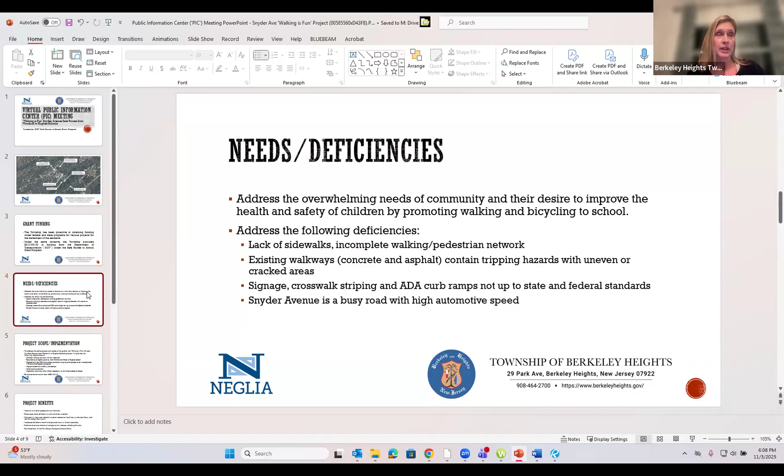If I can hop in for a second, Mike. So kids coming from the Timber area, if they don't go through some path, they're walking down Locust. They have to cross Snyder at the rescue squad to get to the sidewalk on the opposite side toward Hughes. Then when they get across from Hughes, they have to cross again to get into the school because there's no sidewalk on the Hughes School side of Snyder. So that was the biggest need right there.

Thanks for butting in. With all these things to consider, we settled on a project scope. Mainly, number one, we wanted to connect the walking network and extend it up Snyder to the school, to help alleviate the issue of kids crossing Snyder twice just to get to the school.

Additionally, we wanted to make sure we resurface the asphalt pathway in the back that kids take from Old Cannon Road to the school. It's just not in good shape right now.

We also want to make sure we're upgrading and implementing ADA compliant curb ramps, pavement striping, and signage, to be in compliance with federal and state standards - MUTCD, NJDOT, DOJ, ADA requirements, and so on.

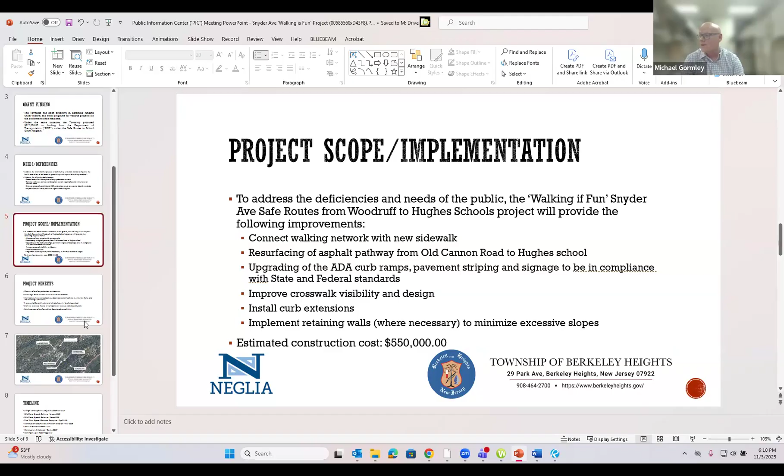Additionally, we wanted to improve crosswalk visibility and design, install curb extensions, and implement retaining walls where necessary along the frontage of Hughes School to minimize excessive slopes in the area. All in all, we anticipate an estimated construction cost of $550,000, which is a little more than the $517,000 grant we received.

Benefits of the project: number one, creation of a safer pedestrian environment, limiting the number of times kids are crossing Snyder Avenue, making sure everything's properly signed, striped, and compliant for all, even people with disabilities.

This way we would encourage more kids to walk to school. But even more than that, as a secondary benefit, it also connects the school to the other school. It completes the walking pathways to other facilities such as Snyder Park and the township's downtown.

Also, it just increases children's health and physical activity levels through exercise, biking, and walking - promoting alternate means of transportation to reduce vehicle pollution, and also reinforcing the township's complete streets policy, which is a very important thing the township has been looking to better over the past couple of years.

So again, looking at the site location map from page 2, as I said, we're looking to implement concrete sidewalk along Snyder Avenue's frontage, an asphalt walkway in the back, upgrading of ADA ramps where they fall within the project, and improved crosswalk visibility, and so forth.

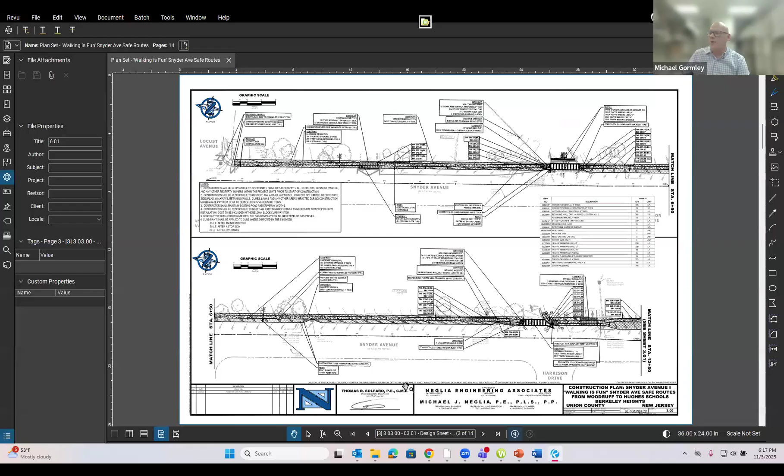Yeah, of course, I actually have the plans open so I can walk you through them. Is there any way you can make that bigger, Mike? Oh, is it small? There's some sort of presenter view or something. I don't know, I never know how to use it. Okay, one sec, let me change up my sharing in a quick second. It's not major, but the equivalent of slideshow in PowerPoint. Right, oh yeah, yeah. Try this.

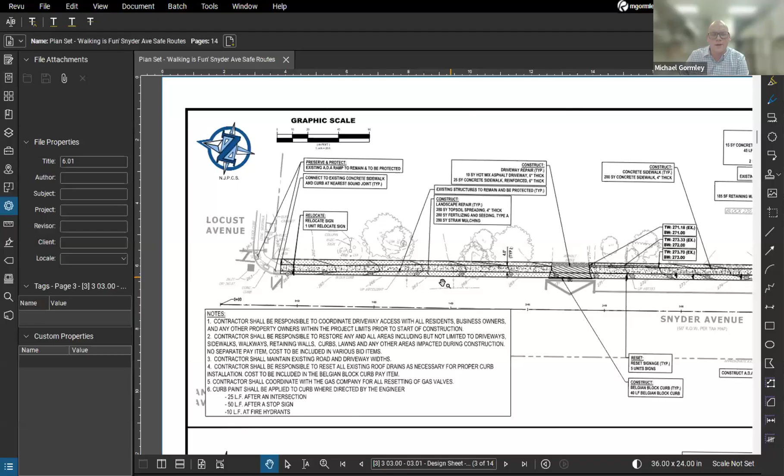Okay, so do you guys see the plans? Yeah, we can see them. Perfect, so I'll just quickly walk you through the plan step by step as we go. Pretty much we start right at Locust Avenue and Snyder Avenue intersection. These ramps were deemed compliant ADA ramps, so we were planning on the plans to leave them.

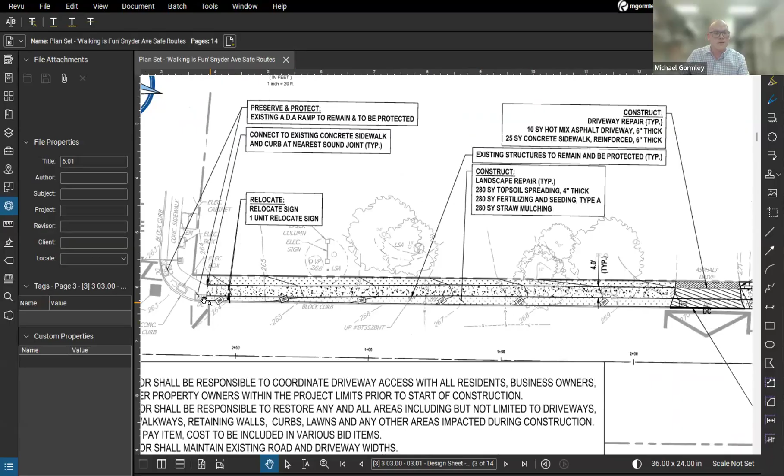The sidewalk ends right here. Currently, this is where the kids across Snyder Avenue have to go up. So the plan is to put a new sidewalk along the shoulder.

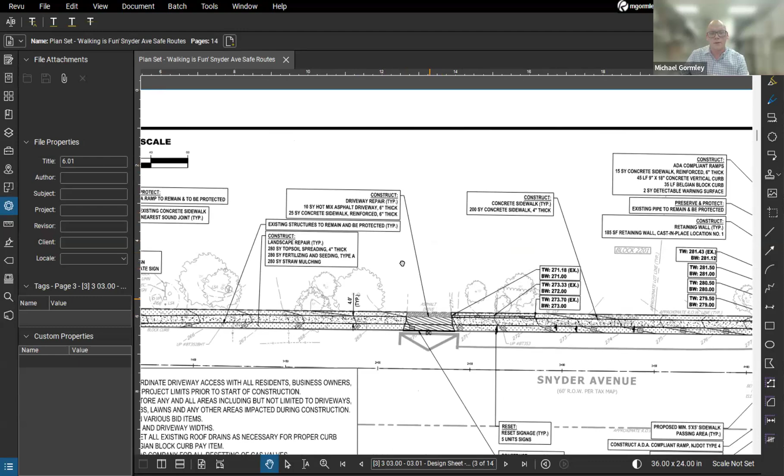This is the EMS building, the rescue squad. We'll do a new concrete apron over there and continue the sidewalk.

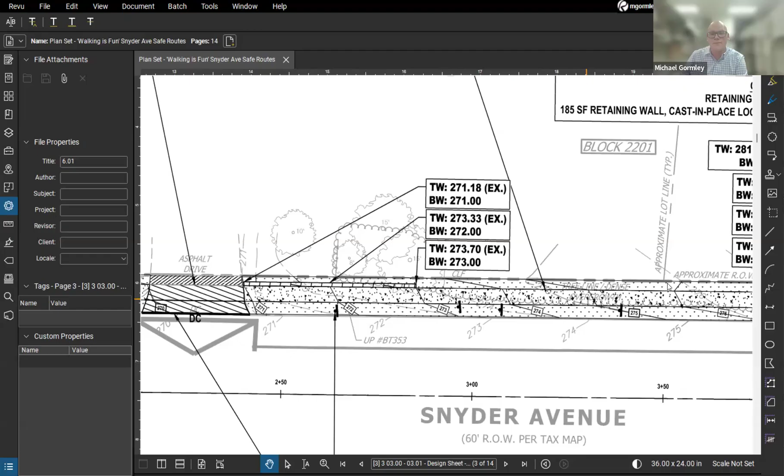Where you'll see it's kind of littered, there are these little walls. They're not super tall, just to make sure we're complying with grading standards and not having too steep areas.

Continue along, and then we'll get to the exit driveway for the school. Handicap ramps, this one is.

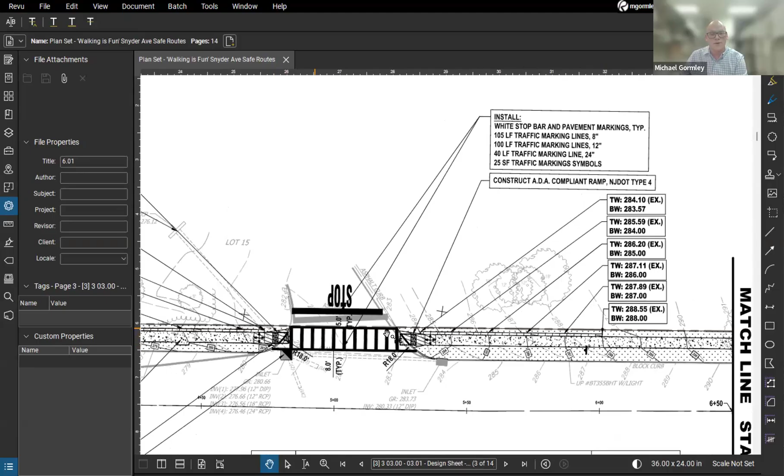This is called an NJDOT type 4 ramp. I believe they're both type 4s. Ramps across the driveway, the exit driveway of the school, receiving ramp, continuation, and retaining wall where needed.

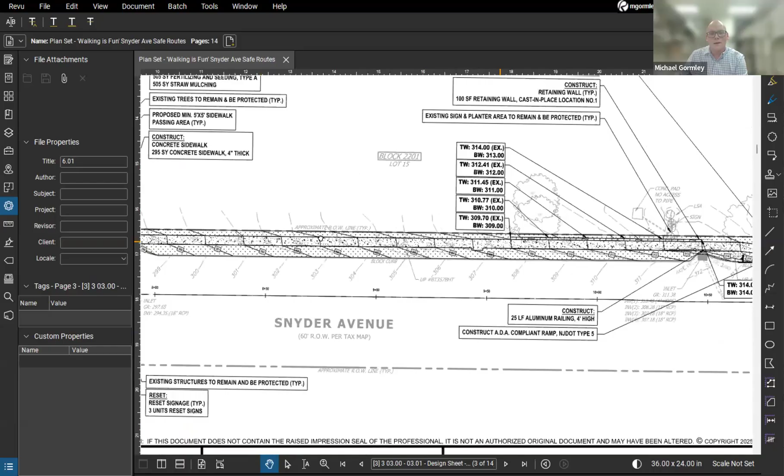Continue up along the frontage of this huge school, and then this is the entrance driveway for the Hughes School, the big loop.

New curb ramp here for receiving this ramp as well as over here. Michael, can you talk about that curve where your cursor is?

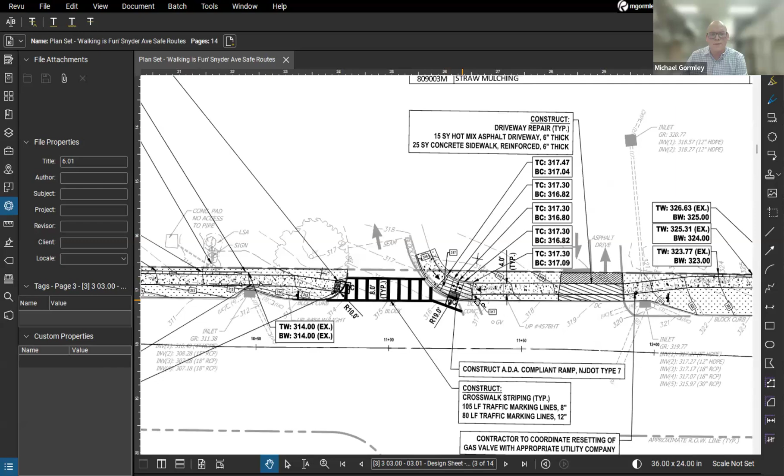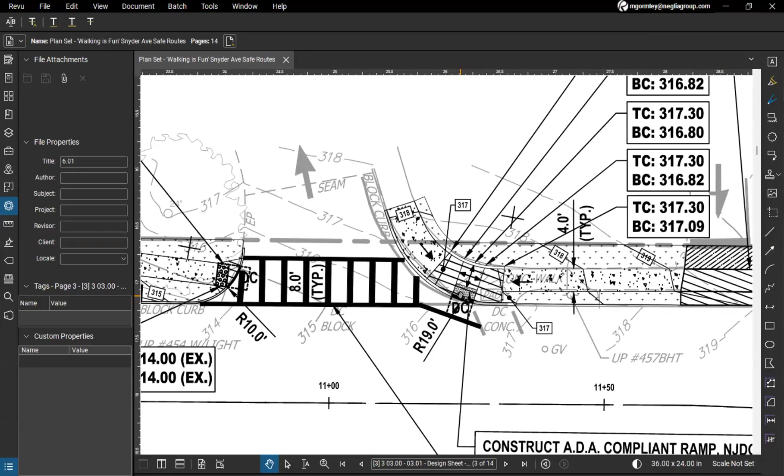It's got that rubber mat with bumps, but it's facing kitty corner to the street instead of either of the sidewalks or crosswalks. Can you explain the placement and angle, and why that compliant ramp doesn't seem to be leading to a crosswalk?

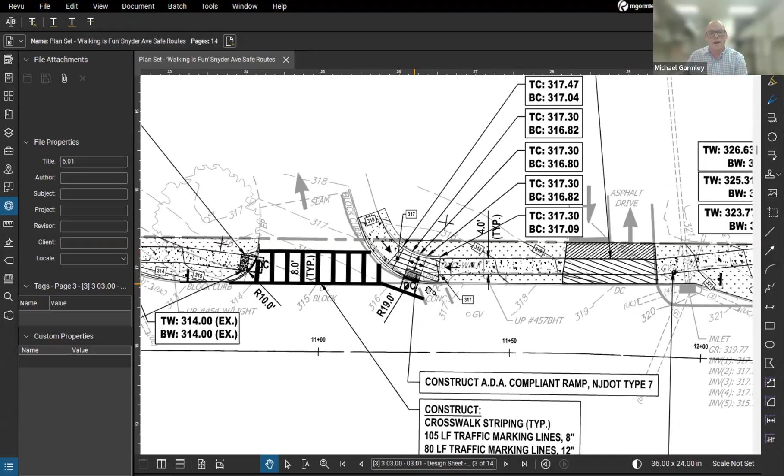Since it's receiving two ramps at the end of the day, there wouldn't be enough space to put two separate receiving areas and come back down. So this is the ramp type the DOT recommends, a ramp 7, as a way to receive both this area, this ramp, and this ramp down here off Harrison Drive.

But do you see what I'm saying? That ramp, if somebody were visually impaired, they would be walking into the street, not onto a crosswalk. Where that ramp is placed, you'd walk forward from it into the intersection, not toward the ramp in either direction.

So that was a question that I had when I reviewed the plans.

Besides what I just stated, where there wouldn't be enough space to have two receiving areas for each of the ramps, there's really a big challenge in this area. I'm assuming everyone's familiar with it—it's very steep to get up this hill. If we tried to tuck the ramp up here to make it compliant, you'd pretty much have to chase the grade all the way up to the school.

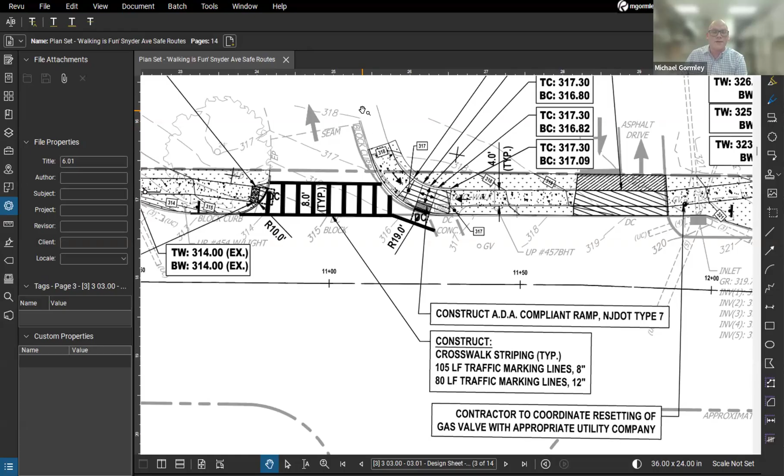Where's what seems to be not shown here—the existing crosswalk that goes across Snyder? It starts right here, those gray lines. Okay, it's just hard to know because you don't see it going across the way.

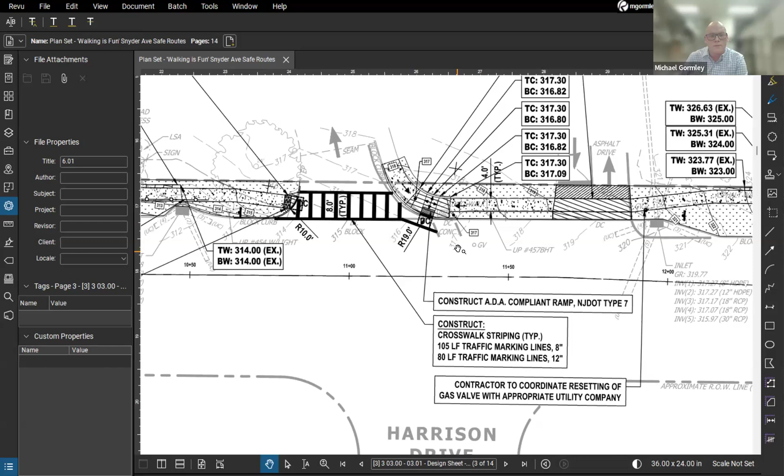The survey was kind of cut off since it would have been excessive to show all the roadway when we're not really touching the roadway much in this project.

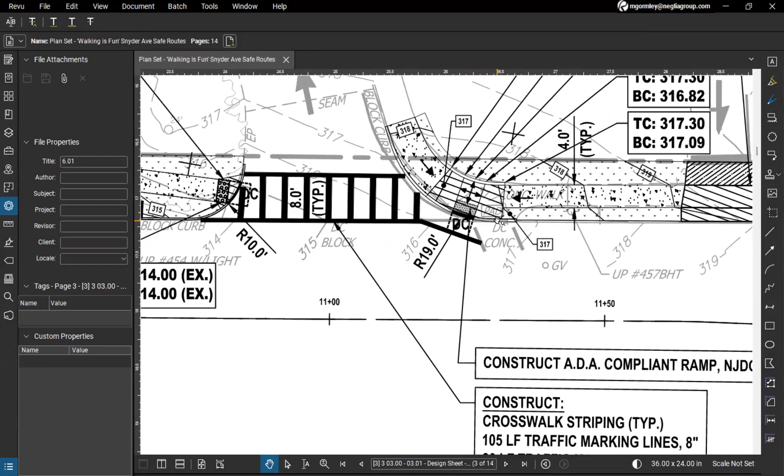So where's the curb cut on that? Because here the crosswalk is a little wonky—where those broken lines of the crosswalk are, there are those two lines next to it.

What is that? It says block curb. So does the crosswalk actually go into a curb?

Keep going. So with your cursor, this on the other side of the ramp. No, the other side. Over here. Yes. What's happening there?

The top line. Which one? Top on this one. No, the crosswalk. Yeah, we got the horizontal lines and the vertical lines to indicate the crosswalk, and the top line, that's the curb, right? And she asked, is that hitting a curb? We think yes, it does have a curb.

Now, I'll add what I notice is that it looks like to the right of the new cutout that's at grade, to the right is the original pad. I guess that's the original.

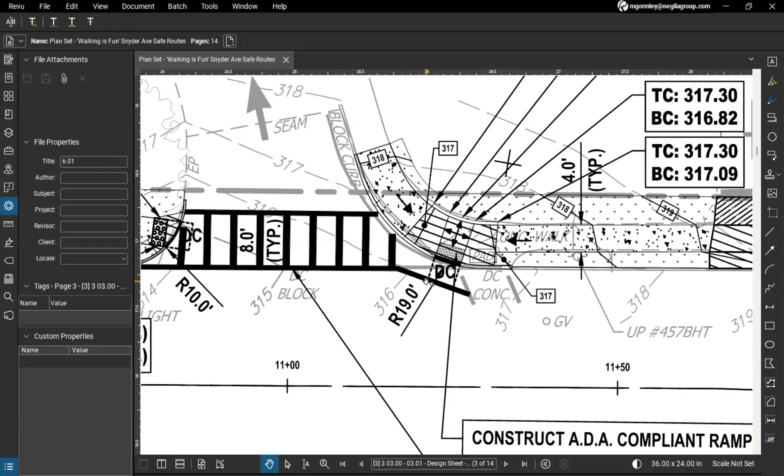And we do it with an electric scooter. Or less, correct. Understood, the means of travel. Yeah, I understand. But it just doesn't seem like there's that much space there.

Mike, can you tell us what that offset distance is right there? This should be 4 feet by 4 feet. Yeah, which is kind of what I thought. It should be 4x4, but we will double check, Councilwoman, to make sure that it complies with the state standard. DOT allows it with their crosswalk design, but we will double check it.

Mike, is there any way we can actually maybe add a second detectable in there, or maybe even a half a detectable, or is there not enough room? So yeah, this was kind of extensive design. We were going back and forth.

At the end of the day, there really is not enough room without the -- not even -- no, but what I'm saying is right next to where the proposed ADA is now. On a design, can we add another half a pad or no? Right here, like this way, on this side? Yes, right there. We could. I just -- the more we go, the more we're gonna have to chase the grade back.

No, I understand. If we want to be compliant, so if not, we'd have -- yeah, why don't we -- and not to cut you off, I apologize.

So why don't we try to stretch the ADA detectable a little more, and see how much we need to chase up the street to keep the depressed area a little longer than just 4 feet in the front. Maybe we can make it up to 6 feet, which gives us a little more inline traffic going in and out of the ramp. You know what I'm saying? Yeah, I know what you're saying. So we can definitely take a look at that.

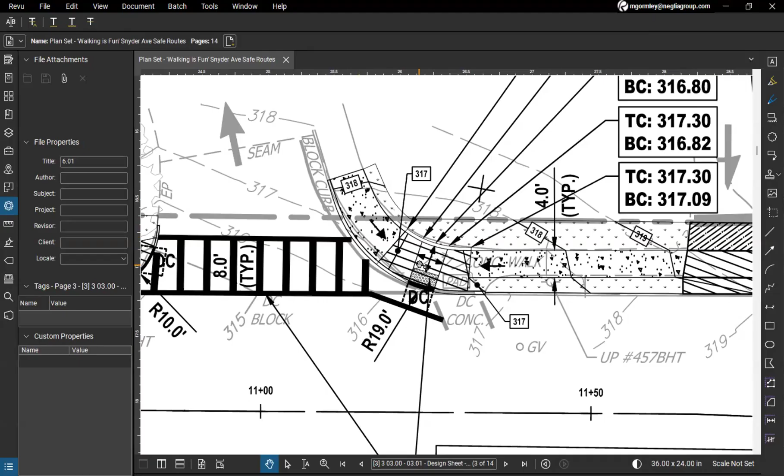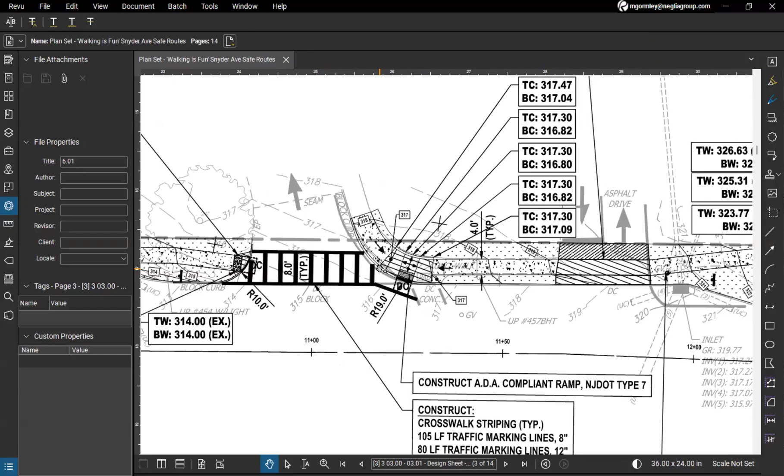And we'll double confirm the offset distance from the curb line or depressed curb to where the stripe belongs. Will any trees be removed during this? I believe in the estimate or the plans there's about 2 or 3. And those will be replaced on the school property, I assume? Yes, we would work with the Board of Ed and other properties along the frontage where a tree may come out or a tree may have to go back in. So yes.

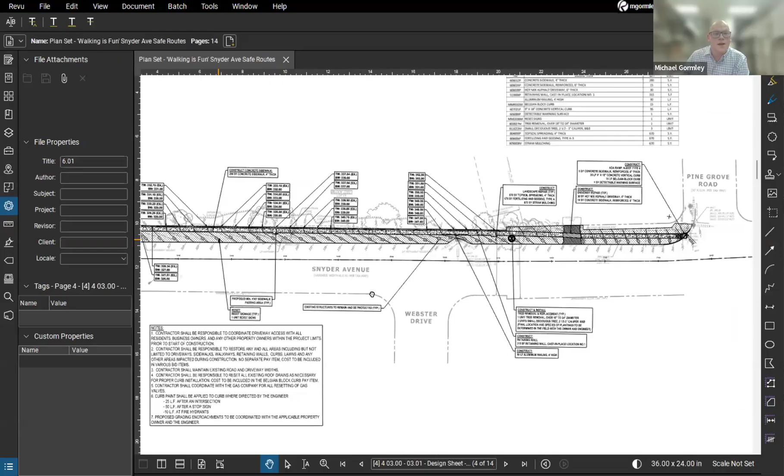Okay, my mostly is actually on there's one tree removal up, I have to jump ahead, but this is up Snyder Avenue by Pine Grove Road and Webster Drive. There was this one tree where currently the path is a little too close to the property line, so we're going to put in a new path and would probably have to take this tree out.

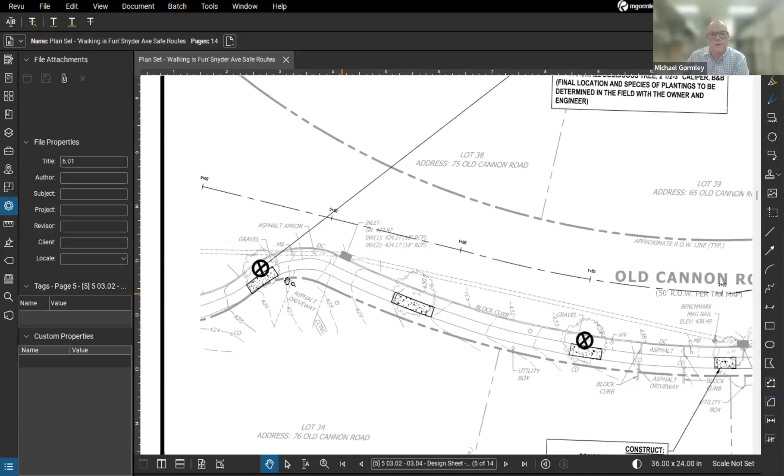We're going to have to take a tree out there, and then skip ahead to Old Cannon Road. I believe there's this tree and this tree. They're a little too big and they're causing tripping hazards on the sidewalk, so they're going to have to take them out.

There's actually sidewalk work planned on Old Cannon Road? Yeah, very minimal. It's really just where tripping hazards were observed, and then upgrading of these handicap ramps to be compliant.

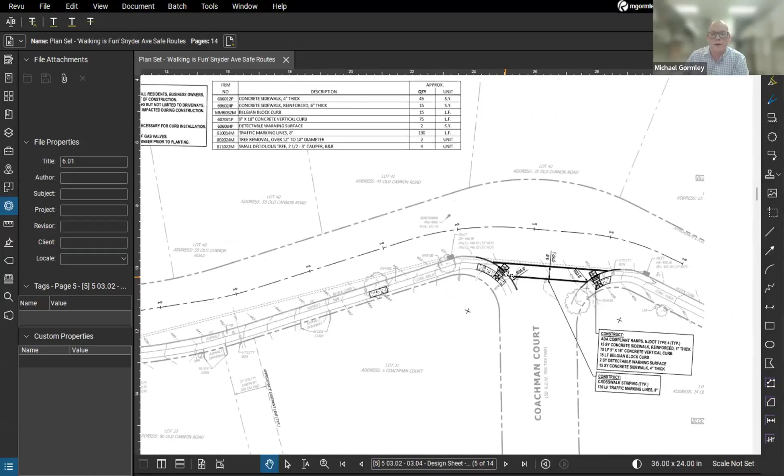Okay, yeah, I understand the need. I've been there, but didn't know that. It's kind of replace as needed, Steve. I mean, obviously there's some tripping areas, you're aware of it because you travel it often. So we definitely want to minimize that and put in conforming sidewalk with slope and get rid of the hazards, of course.

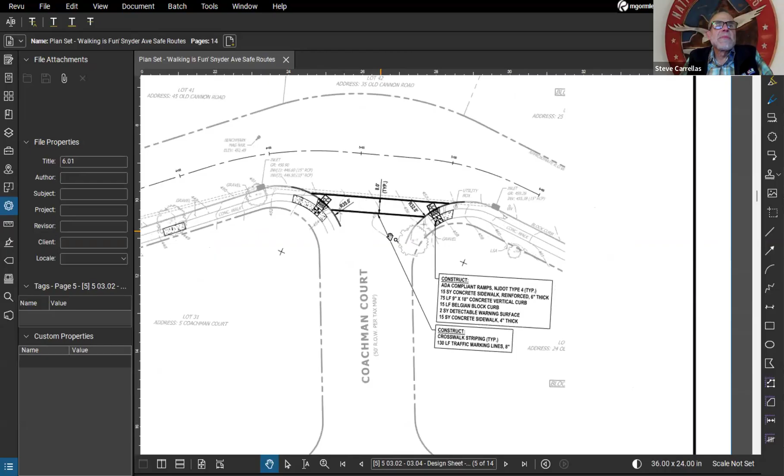Yeah, there had been further toward the mountain from this picture some repair to some really gnarly lifted blocks. So yes, agreed.

Yeah, the job itself is pretty simple and straightforward. I'm sorry I jumped in late, so I'm sure Mike went over most of it, but it's concrete sidewalk, asphalt sidewalk, going through the easement off Coachman down towards the back of the school. There are some tree removals, tree replacements. There's a retaining wall just to tie back in the slope in front of the school. New ADA ramps, striping, all the basic pedestrian safety type improvements for such a project.

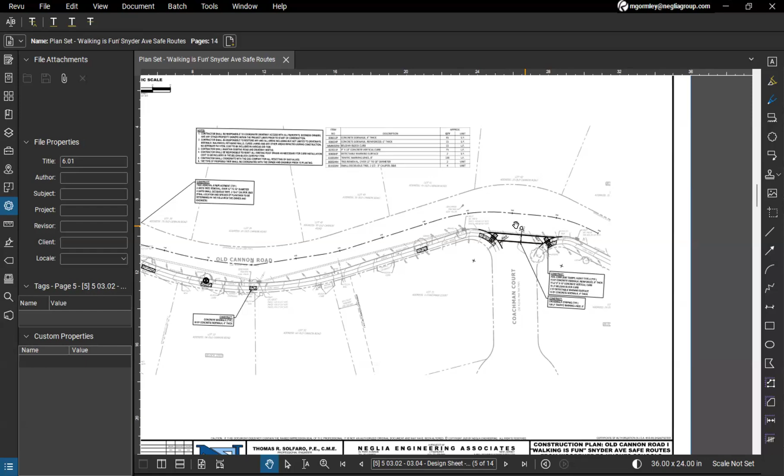So the Girl Scouts had done a project to improve plantings along that trail. Is that going to be disturbed by this new project? Has that plan been implemented, has it already been installed, or is it to be installed with the Girl Scouts? Liza, do you know?

Liza, you're on mute. Sorry, I have too many windows open.

Yes, they did that project very quickly. So if you go up there, it's well off the path. I believe they specifically did their project well off the path because we told them we didn't want to disturb it with any of the equipment that might have to go in there when we improve the path. So there's plenty of room, and it is also only on one side, what they did.

Yeah, and obviously the intention is to minimize any type of disturbance, but if there's some voluntary work that was done back through there, we'll make sure. Mike, maybe we can head back out before we go out to bid and mark it on the plans, and put a note on the plans to contractors to stand clear and protect that area as needed.

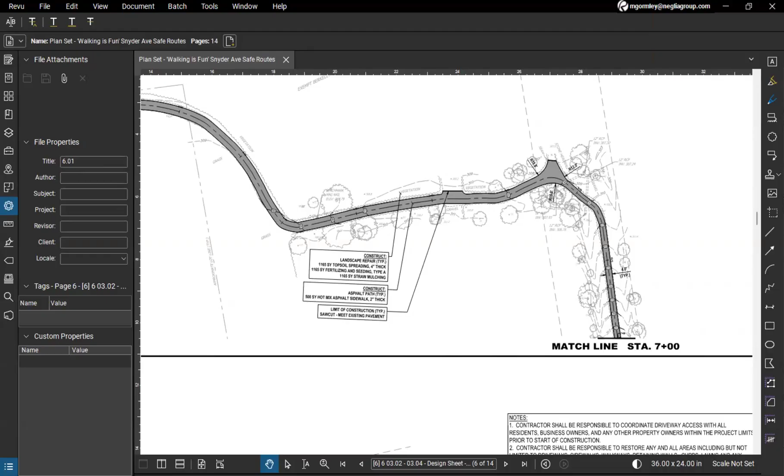Do not touch the Girl Scout project. Yeah, exactly, or you won't get any cookies.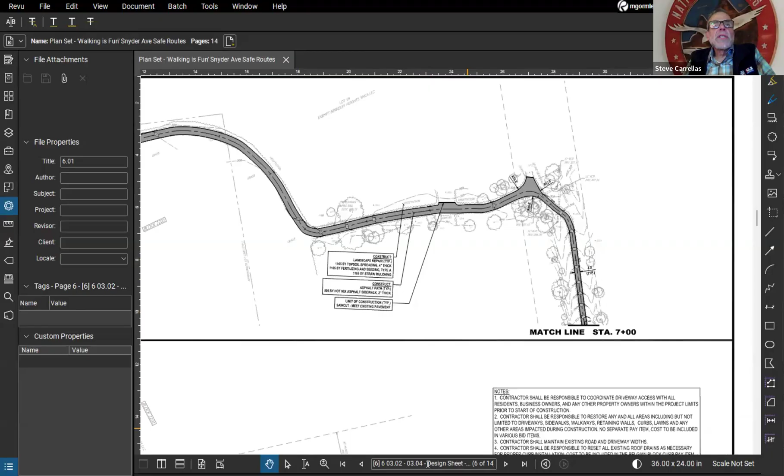I have a follow-up question. After seeing the initial presentation and the diagram, that stretch between the school and Pine Grove, which is currently asphalt and was redone in the last five or more years, is that going to be converted?

I just want to confirm what was said. Is that going to be converted? Yes, it's going to be converted to concrete sidewalk. Everything on Snyder Avenue will be concrete. The only asphalt improvement would be the walkway off of Coachman, off the cul-de-sac, heading back down towards the back of the school. That would be asphalt, because it's all that way now. Correct, yeah, or what's left of asphalt. Exactly, very good.

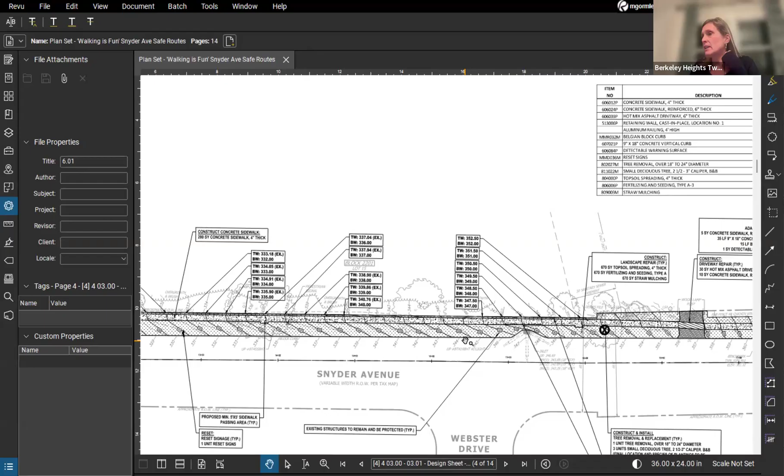Hey Liza, what was that main menu section? Okay, so if you're on the homepage right now, just hover over Services, and then under the gray bottom right part of the bar, 2025 Infrastructure Projects. I just needed to know the section without having to look at everything. Thank you. Yep, no problem.

Anybody else have any questions?

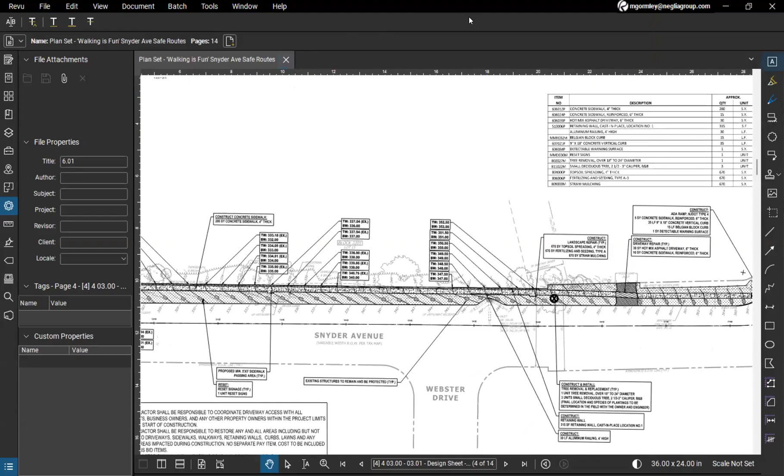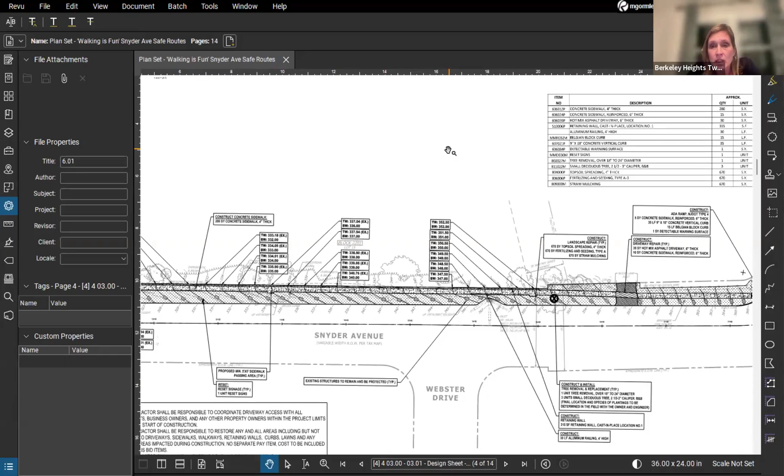Liza, were there any questions submitted to Angela before the presentation tonight? Yes, one. Hold on one second, let me get it please. So, for people in the audience, as part of this public information center we're supposed to go over changes and questions people wrote in. So here is one of the questions. Good evening, thank you for sending this information, much appreciated. Unfortunately, the link for more information is not working.

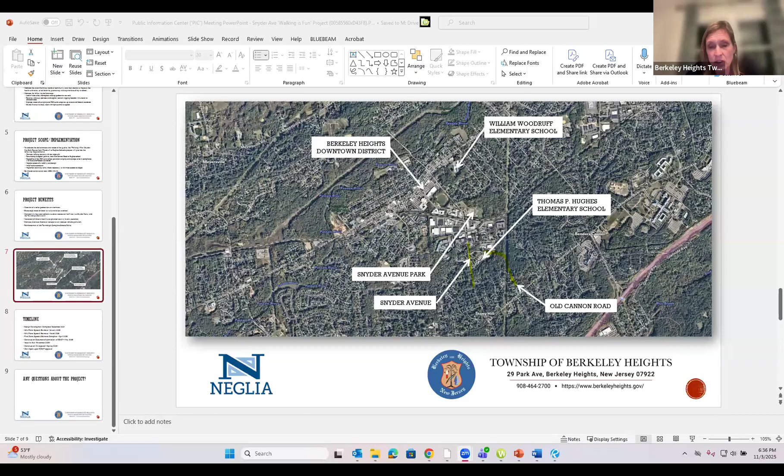That has been fixed, but I'm required to read this whole thing. On a different note, I love the idea of sidewalk improvement. That said, will scooters and bikes be permitted on the sidewalk? That is a big concern if they are to be permitted.

Tom, I can speak to this, if you don't mind. Go ahead. So what was the question? Are they asking if they're restricted, or are they allowed? They're asking if scooters are going to be allowed on the sidewalk.

I know the administration and the police department were reviewing situations in other parts of town. So where it makes sense from a safety perspective, they would be allowed. There might be other parts of town or access ways where they might be restricted, but that's a work in progress. Nothing is set in stone at the moment.

That's something PD and the administration are working on, and I know eventually I'll be looped in to review some safety aspects, and then we'll make a determination on how we might want to present an ordinance for adoption or acceptance. There's not going to be a blanket ban on sidewalks in town.

Some places, such as Mountain Ave, have no shoulder, so it's unsafe, especially for younger kids. So it's not going to be a one-and-done type of decision. It might be different for different parts of town, meaning each location would be site specific, right? I'm sorry Steve, if I cut you off.

That's fine, I was going to say that sounds like the discussions that have happened. The key thing to talk about here and now is there is no ordinance in this town disallowing bicycles and e-mobility devices on sidewalks.

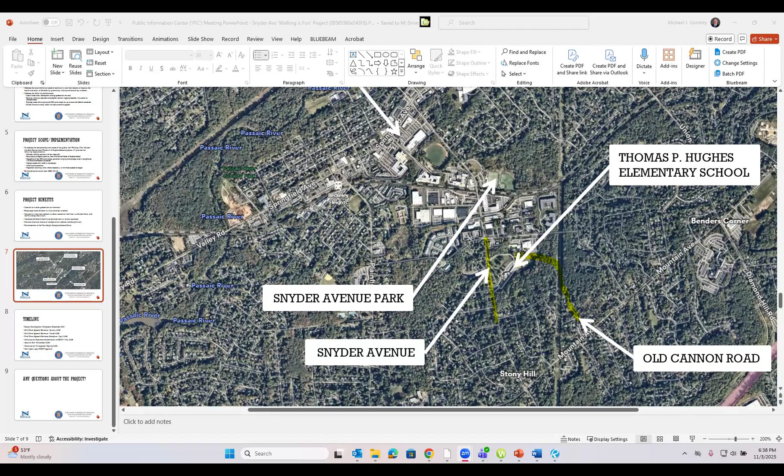If that's the direction the town chooses to take... So keeping this on sidewalks, will there be public information available about the other sidewalk projects that are going on? The one that goes from Upper Snyder Avenue from the park shopping center to the park with the new crosswalk—I understand that's not part of this presentation—and also the Springfield Avenue sidewalks.

Yes, there definitely will be an update. So we can talk about Springfield if you'd like to.

Obviously we don't have presentation details on that, but that job's bids just came in the other day. I believe it came in on Friday, and that included brick paver sidewalks, depressed curbs, aprons, driveway repairs, and aesthetic lights, basically from River Road all the way to Plainfield Avenue, both sides of the street. So that job just came in. That's also a DOT funded project. We're reviewing the bids now and will offer a recommendation to the governing body for review and consideration, subject to the availability of funds. So that's where that project stands.

And then the other project you were referencing, you're talking about across from Snyder Park on Snyder? Or are you talking about from Mountain Avenue down on the park side, the piece from essentially the Bank of America to Snyder Park? Is that part of this grant or project, or is that a different one? No, great question, it's not part of this grant.

But what we did was put an alternate bid into this project, hoping DOT approves it as a continuation, since it's contiguous to this project, so they'll just allow it with this contractor to do that work. We do have plans to put in a sidewalk on the Bank of America side of Snyder, going across the frontage of the chemical plant, Chemtrade, to get to Snyder Park. So there is a sidewalk provision. Mike, do you remember the linear footage roughly of what that was? It was to put sidewalk on the opposite side of Snyder to get to the park and connect to downtown. So that was an alternate bid in this project, though it wasn't part of the grant.

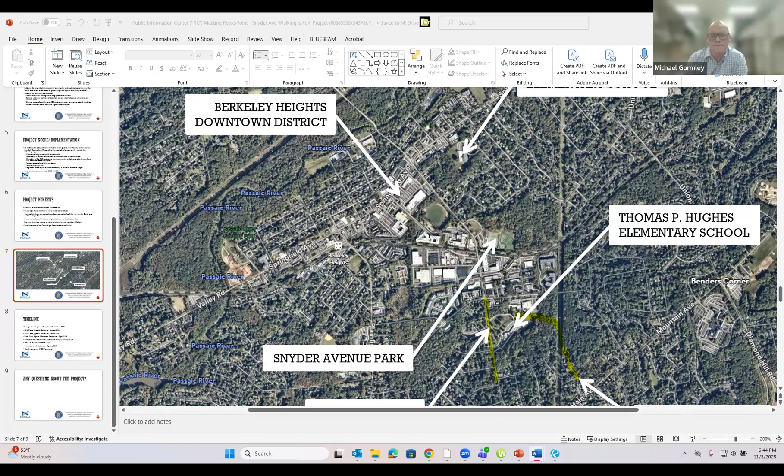Because if you're pulling the sidewalk down on the side of the chemical plant, how will the crosswalk be, would the kids go right where Ferndale meets? Yes, correct. Mike, can you just pull that plan up so people can see it?

Liza, I've actually been emailing you for like 4 years about this, I don't know if you remember. Yes, I was wondering if you were the same, Alicia. Yes, I'm happy to hear this because I haven't gotten a response from you in some time, unfortunately.

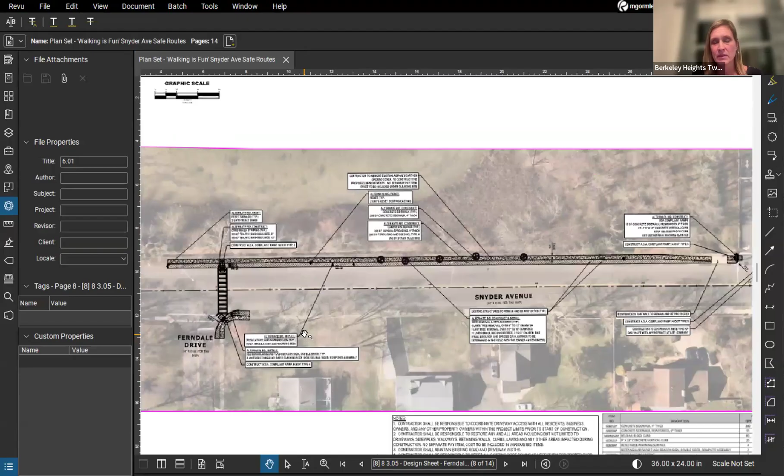I was curious, are you looking at the speed limit at all too? That's not part of this analysis and review, the speed limit is not part of this project nor grant. But is it part of the town's work? Because I was told a traffic study was going on here, and the speed actually goes higher as you're going into town, which doesn't make sense with all the children that walk in this area. I don't know if you guys are evaluating that.

That evaluation is not current at this point in time. I know the administration and myself were aware of the potential concern, but that study is on the back burner at this minute.

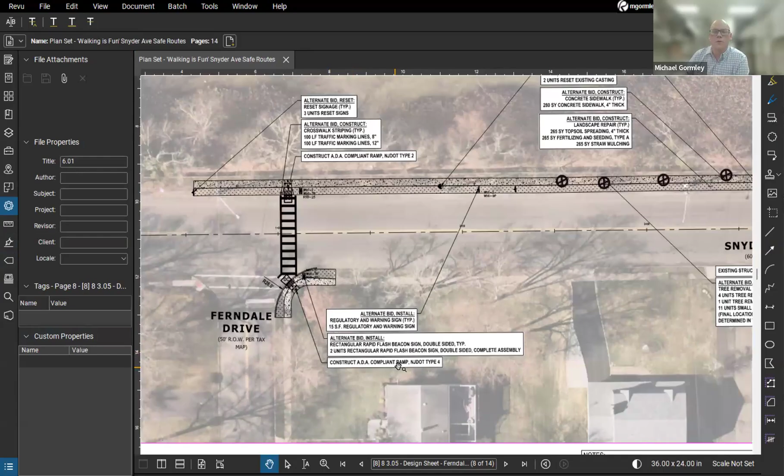And then I can't tell, is there an RRFB going in at this crosswalk, like the flashing beacons? Yeah, there'll be two flashing beacons, one on each approach for the crosswalk.

Okay, that's great. And what was the timing you said that's going to go in as kind of part of this, the Snyder Ave at the northern end? I'm sorry, at the southern end. And if the funding's up there, you'll be able to put this in.

So probably 2026. Yeah, we're shooting for the spring of 26. Right now the DOT still needs to approve us to go out for a bid. That's one of the requirements of the grant, as is this public participation hearing that we're having right now.

Obviously, this meeting's being recorded, we have to take attendance, and everything needs to be sent down to the state. They'll review it and concur, hopefully that we did it within their guidelines and policies and procedures. They'll do one check of the plans, and hopefully they say, 'Hey, Berkeley Heights, go out for a public bid, you're ready to go.' And with that being said, since unfortunately we're ready in November, this job probably won't kick off construction-wise until sometime the spring of 26.

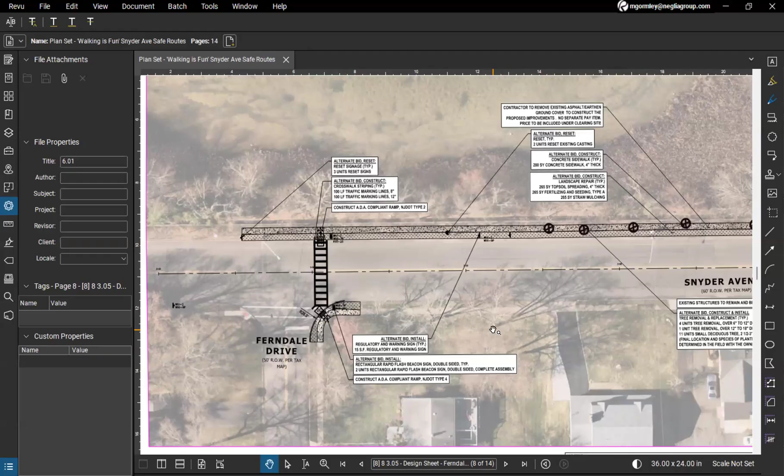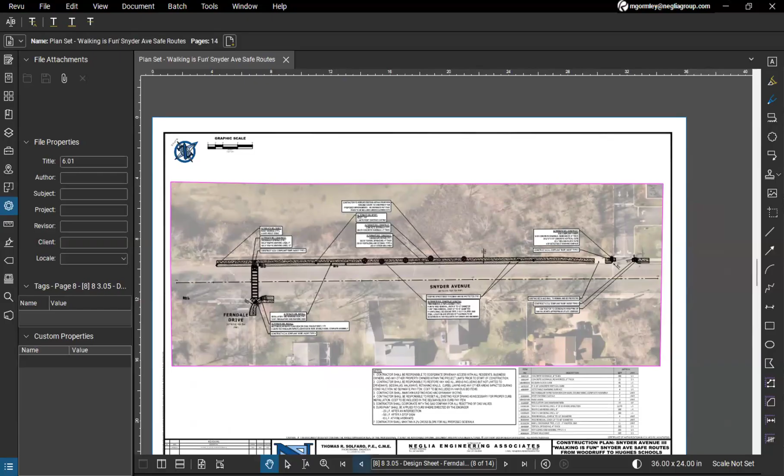Okay, and then I'm really happy to hear about all of this. What about the striping on Snyder in this area? So you made some changes in front of the school where there's a wider shoulder, but what I've also been saying for 4 years is that we could add a wide shoulder, and that would actually help slow people down and allow people on bikes to ride safely in the shoulder too, especially in front of the park. Is that something you guys, if you haven't already, can consider as part of this?

You don't have to pave the road to put that in. No, you're correct. But that comment and concern has been put through the police department in my office, and we will definitely take another look and reconsider how we can, I don't want to say lane restrict, but promote some other means of transportation also with a bike lane or something along that edge. I don't have the exact dimensions right now off the top of my head how wide that road is, but I know that was something to be considered, moving forward to see if that actually can take place and be effectuated.

I think there's definitely room to just stripe the shoulder, the width of the lane, there's no striped shoulder in that section. It looks like when work was done to the south of the railroad tracks, there was a shoulder put in there. But to the north of the railroad tracks, there's just wide lanes, especially with all the kids on scooters now too, and bikes right in front of that park. I think it would be very helpful if you guys could stripe. I understand the paving isn't part of this, but if you can stripe the wide shoulders, that would be very helpful all the way to downtown.

Noted, and I appreciate your comments. We'll definitely take a look at it and see what, if anything, can happen. So Liza and Tom, that's something that we noted on the Complete Streets Committee.

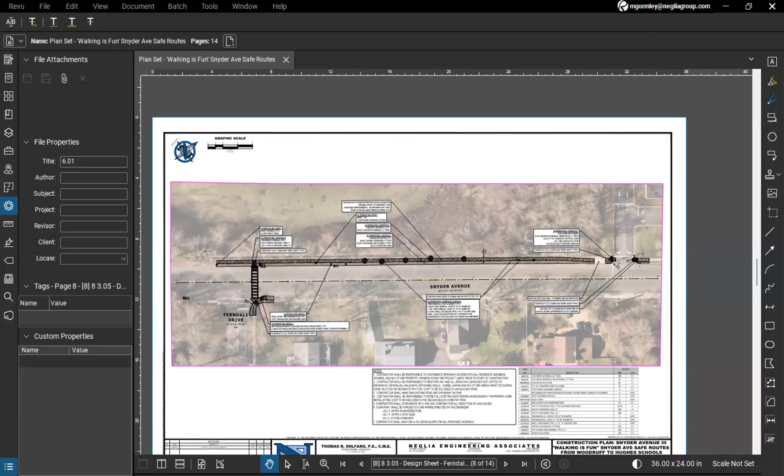I'll have to go to the Environmental Commission. I think it did already, right? Didn't it, Tom? Did this project go to the Environmental Commission? We've had conversations with Tom Bacco and Rich Leister. It was like two years ago at this point. I don't want to minimize it, but the disturbance really is only two or three trees, which will be replaced to their satisfaction. Correct, yeah, that was reported earlier.

Yeah, I'm just referencing meetings I'm going to. Oh, I'm sorry, I'm sorry. Not a problem, not a problem with them.

Tom, thanks for adding this discussion about this part of Snyder, because that was on my list of questions to ask you, since it was a separate design. It wasn't part of the original grant application, so it was tricky how we wanted to present it within the project scope, because it's not technically going to be reimbursed. But we thought it was necessary to add it, continuing the extension and connectivity in that area, from downtown to the park and heading back up towards Mountain Avenue. So we put it in as an alternate bid, subject to funds available. Hopefully we can effectuate that improvement with this project.

So we know it's very important. Well, you've got the design, and that's always the starting point. Money is always the determinant of when you can go ahead, but I know it's been on the list of projects for you all to look at, part of a resolution the council passed. So at least there's something to show for the design part, and then it's like construction, that's again depending on the money, and hopefully sooner rather than later. Fingers crossed, sooner.